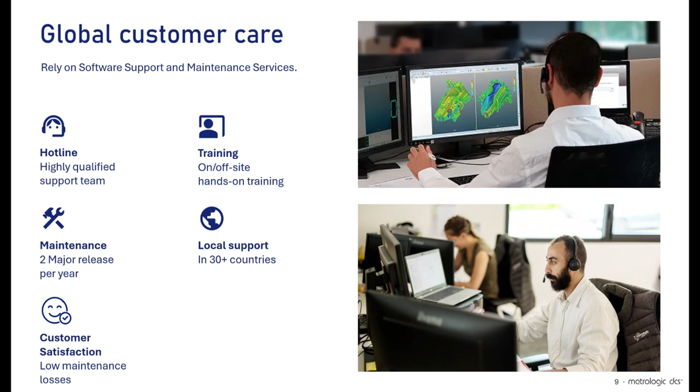We are proud of our core values: winning together, curiosity, responsibility, and customer focus, to always be close to you. In addition to our development and testing teams delivering 2 major releases each year, we provide comprehensive support through our hotline, training programs, and professional services for your custom projects. We also offer CMM maintenance and retrofit services for long performance and reliability.

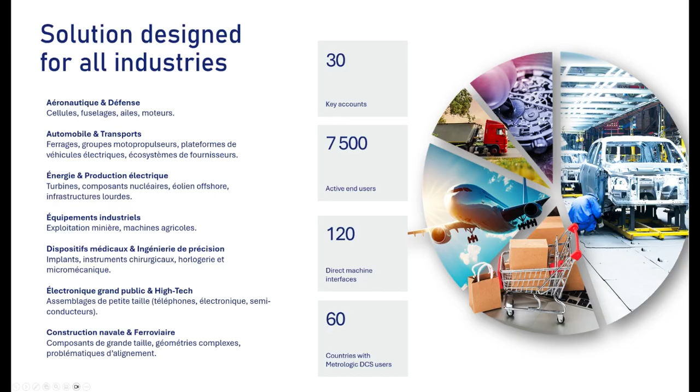Our solutions are designed for multiple industries, including automotive, aerospace, and defense, but also more high-tech markets such as medical devices and luxury watchmaking, for example. We have more than 30 key accounts and 7,500 active users.

Now focus on the topic of today: what is inspection flow? The objectives of this chapter are to understand what inspection flow is, our vision, the focus on the entire process, and its role in relation to our existing products. So what is inspection flow?

First, inspection flow is a metrology intelligence platform. In other words, it connects inspection data coming from different places, different stages of production, and it organizes everything with a clear structure.

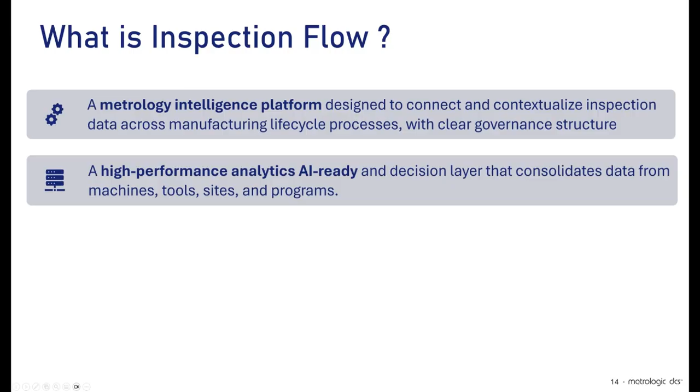Second point, it's a powerful analytics layer ready for AI. It takes data from your machines, your tools, your sites, your programs, and brings it all together in a single place so your teams can finally see the full picture.

Point number three, it's a scalable solution. It connects three roles that are usually separate - metrology, process control, and manufacturing - together for the first time.

Point number four, inspection flow turns your inspection data into something useful: statistical insight, operational alerts, information that is ready for AI, so you can make better decisions faster. Inspection flow brings a deep understanding of tolerances, GD&T, and metrology traceability. To summarize, inspection flow is not just a tool, it's an intelligence layer for smarter, faster, more connected manufacturing. Inspection flow doesn't just say what is wrong, but why, and what to do to reduce rework and scrap rate.

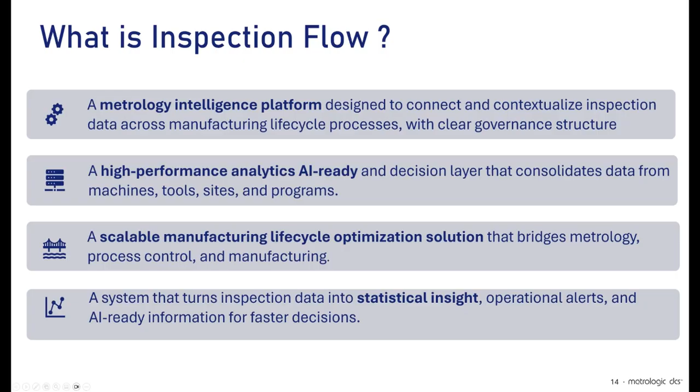Our goal is to centralize and connect all quality and inspection data and to deliver a reliable, real-time statistical insight. We want to be informed at any moment, every step of the manufacturing life cycle. The ideal scenario is simple: if one part is bad or out of tolerance, it's detected immediately, and the following parts are as close to perfect as possible.

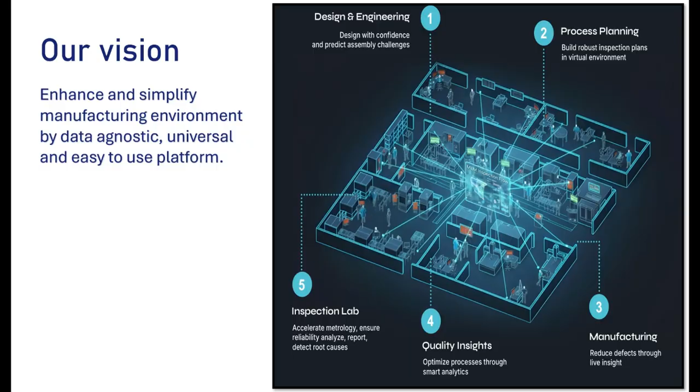Inspection flow starts your industrial AI journey by bringing all your shop floor data together. On this slide, we look at the full manufacturing process from design to verification. Our goal is not to change what you, as a customer, are already doing. The goal is to keep the same products and the same skills. What we bring is an additional layer that connects everything together.

This is where inspection flow comes in. Inspection flow is a central platform that manages the inspection process, collects and stores all data, and connects the entire system. As a result, everything becomes centralized, data is accessible in real time, and the goal is simple: create a fully connected system, more digitalization, faster communication, and immediately close the loop.

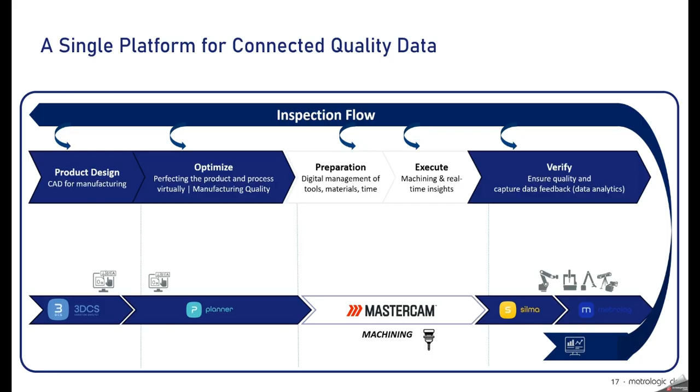So now we will see what kind of problems inspection flow solves. The objective of this chapter is what breaks today for the customer, what inspection flow does to solve this, and to focus on the general pain points.

Today, data is fragmented across different tools and sites. But now, with inspection flow, we replace that with a centralized and governed data ecosystem—one single source of truth, accessible and reliable.

Point number two: today statistical analysis is manual and always done after the fact. That's not possible today in 2026. So now, with inspection flow, we move to real-time, actionable manufacturing insight, so teams can act now, not tomorrow.

Point number three: today's information sits in silos and visibility is limited. With inspection flow, we bring total transparency and cross-team collaboration. This is very important—everyone sees the same data at the same time.

Today, feedback to the design team is often slow and informal. With inspection flow, we want to replace it with structured and automated feedback loops, and we're taking it a step beyond—the data is future ready, providing assisted decision making. In short, inspection flow doesn't just solve today's problems, it prepares us for what's next.

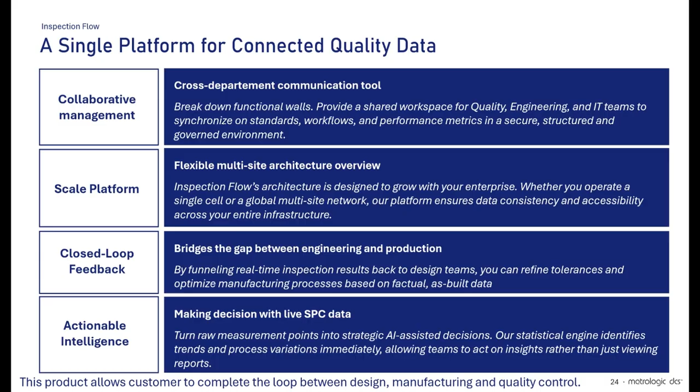Now let's talk about who actually benefits from this solution. First, design engineers—they need real feedback from production to adjust and optimize their tolerances and GD&T specifications. Second, quality directors and managers, because they need strong feedback to make better decisions with their team.

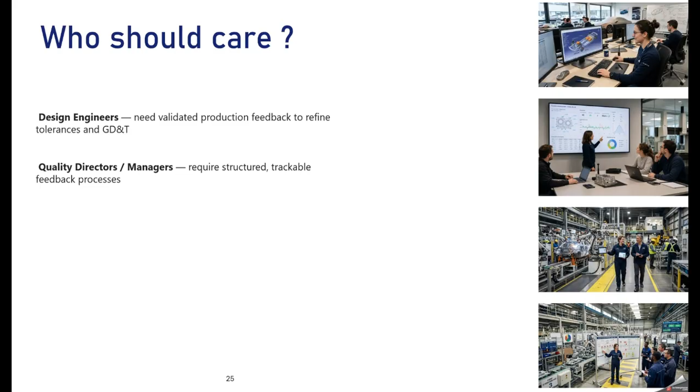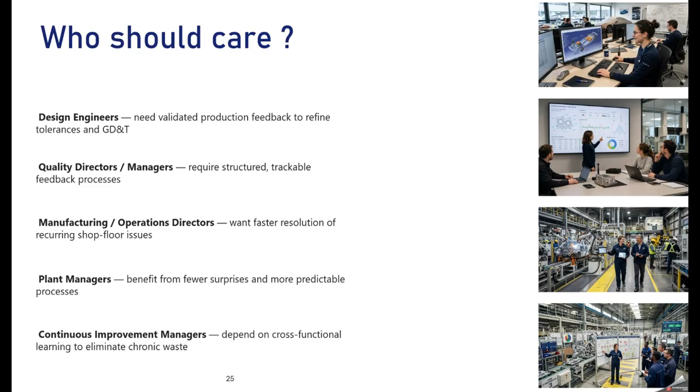Third, manufacturing and operations directors—their priority is to resolve issues faster. Point number four, the plant manager—they don't want surprises, they want stable processes day to day. And finally, the continuous improvement manager may also be interested. As you can see, this solution addresses real pain points across multiple roles, from the design office to the director managers.

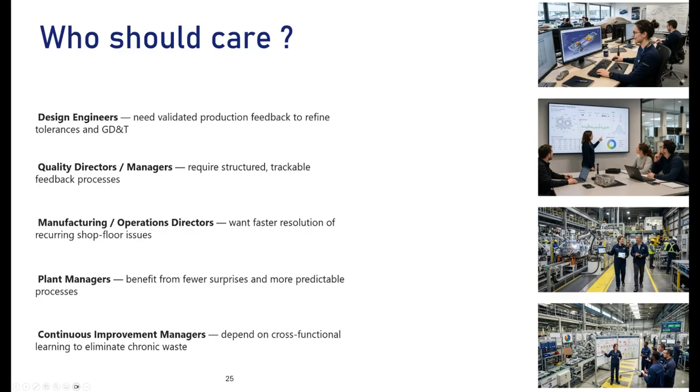Let's go now for the demonstration with Inspection Flow. When you log in with your account, you can choose which business unit you want to work on, which allows you to filter the different projects if needed.

Now let's talk about our account and access. Today I have full access. I will be an operator, a quality manager, and a programmer today. I can change various settings, maybe the language, the theme, switching between light and dark mode. We can also create additional business units if your company evolves or grows. You have full control over this with Inspection Flow.

Now with the action menu, you can view the last action performed, for example if you convert a specific model or start a product with Inspection Flow.

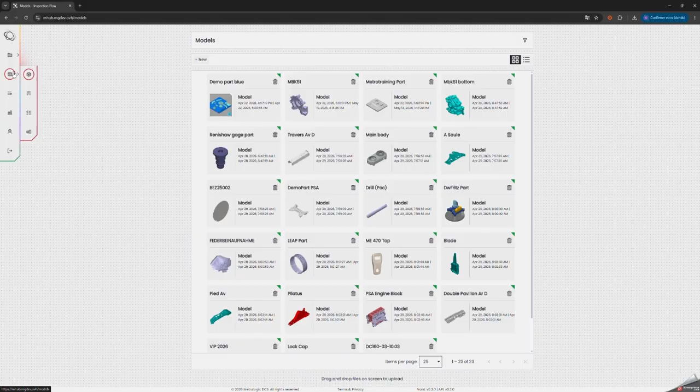Now let's talk about what we call asset management. You have access to all your models to inspect, all your measurement resources, all your CMM, arm, or maybe caliper, and access to all your rules. For example, if you want specific rules to analyze and inspect cylinders, and access to all the computer resources allowing you to start Inspection Flow.

Now it's time to go to the process menu, and using the project tree, you can find all your projects and documents on this page. Some already have results, others are still in progress. We can add subfolders if necessary without any problem.

Imagine I want to inspect a new part and start a new document. I have to go to the right subfolder and create a new inspection, so first I have to create a new document. To do that, I click on New and select a name for my document.

So, demonstration with MBK part, for example, and set some information about the details. Today it will be a demonstration for the webinar. I always have the possibility to select which project I want to work on.

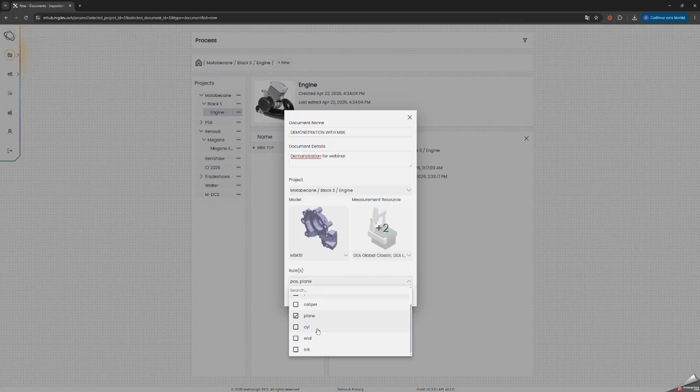The next step is to select my model, so the MBK today, and select which measurement resources I want to work with. I have the possibility to select multiple CMMs, and if I want to use specific rules, I can select them on this page. I click on Save, and my document is ready to be used with all the information necessary to work with.

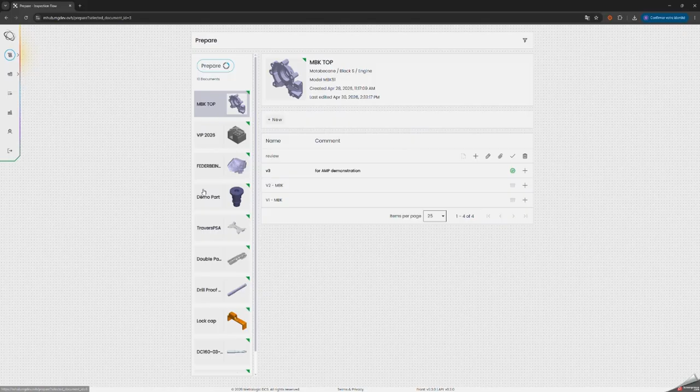So now the job of the quality manager is done. I can change my cap and become a preparer. I'm close to the design department, and I have access to all the documents ready to be prepared, ready to get a new inspection plan.

So I'm going to the demonstration with MBK document, and I will start creating a new inspection plan. I select my name, demo V1. I can add some comments. Today I want to decode only the model with all the PMI.

As you see, Planner is automatically started by the application, by Inspection Flow. My next step is to create an inspection plan collector to decode all the GD&T, all the planes, all the cylinders, and all the views.

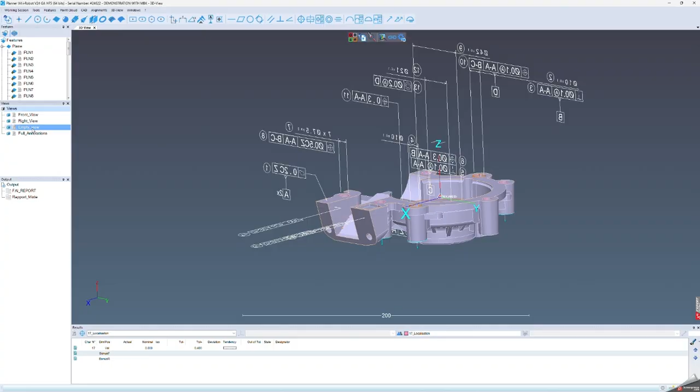I have the possibility now to add a specific view if necessary. I'm free to add a detailed view like this, so I put my name, full annotation 2.

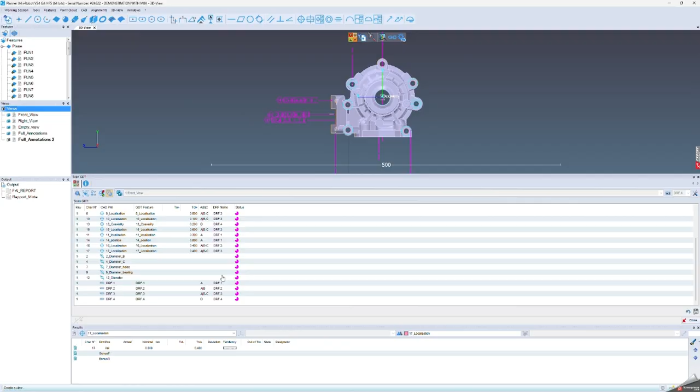There's also the possibility to check with the scan GD&T the status of each PMI, each GD&T, and this will change during the inspection with the result.

Now I want to assign rules with Planner, so I can add, for example, a specific alignment because I'm close to the design department and I know which alignment I have to use.

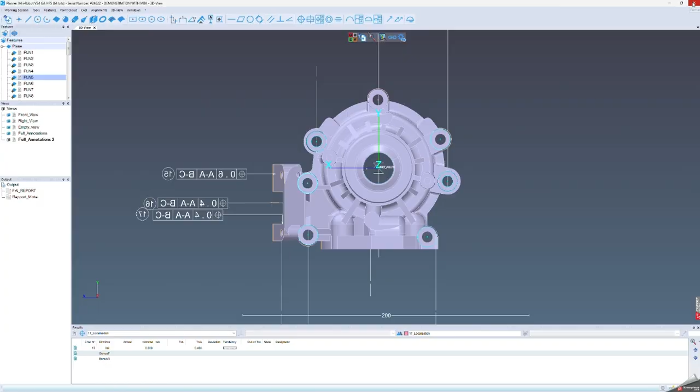So the job is done. For example, I can click on Close, and I don't have to save anything. Everything is automatically saved by Planner, and I have the possibility to delete, validate, or edit the file.

Maybe if I want to edit some information, it's possible with Inspection Flow. So, for example, just change this, and for the example, I will validate the inspection plan. So I click on Yes.

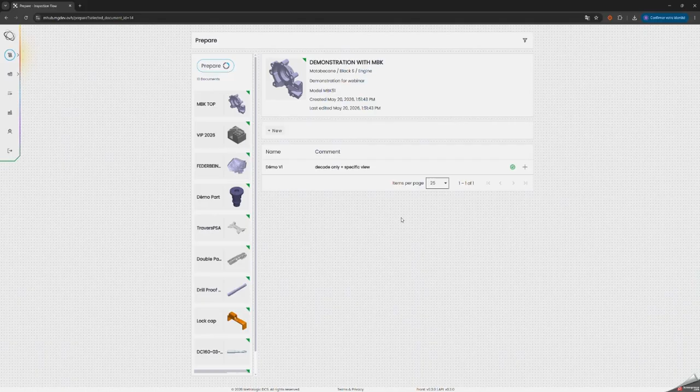But now imagine I want to add something because something changed. I can create a revision directly from my inspection plan V1. I just have to change it, so it's not inspection plan V1 but V2, and I add the comment to be precise: I want to add a flatness on plane number 4.

So I just have to start Planner again, always with Inspection Flow. It automatically starts. Just open, just create the flatness, so I'm going to the flatness.

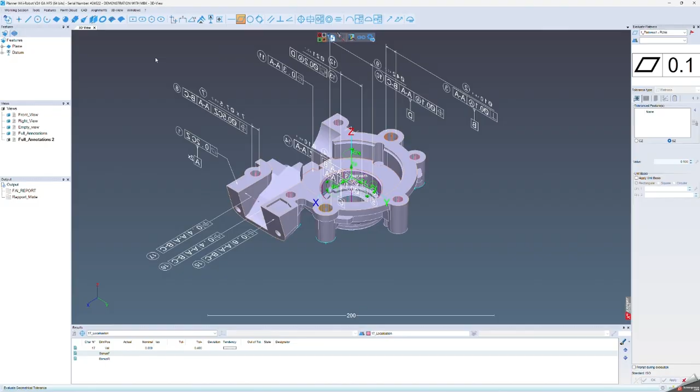I can change the name if necessary, I'm free to do it, and select plane number 4. Click on OK, change maybe the value of the tolerance, 0.2, click on OK, and my flatness is added to the features database.

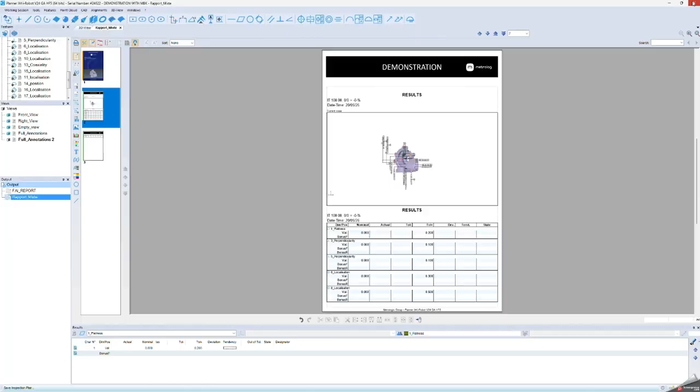So just now click on close, but just before I want to focus on the report. I can create a specific report if necessary for the end of the inspection. As you can see, now I have to validate the inspection plan V2. So I click on validate and yes.

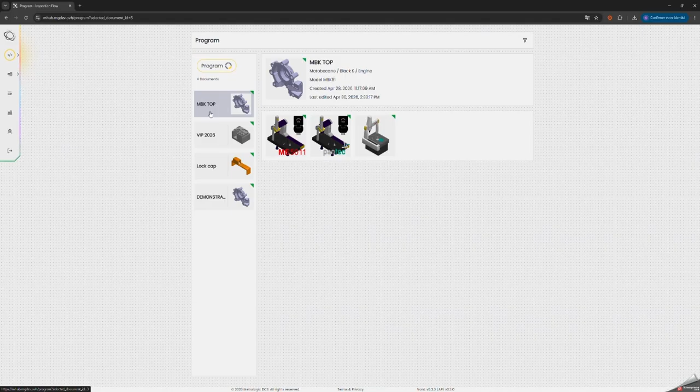So like this, I have only one inspection plan to work with. So I can change my cap now. My job is done, so I can become programmer offline. So imagine I am in another country, maybe it's possible.

And I have to select now my document. So always demonstration with MBK and select the CMM to create my program. So I want to select today the Pantec. And like inspection plan, I have to create a new version of my program. So demonstration prog V1, and put some comments. So today I want to work with the inspection path planning.

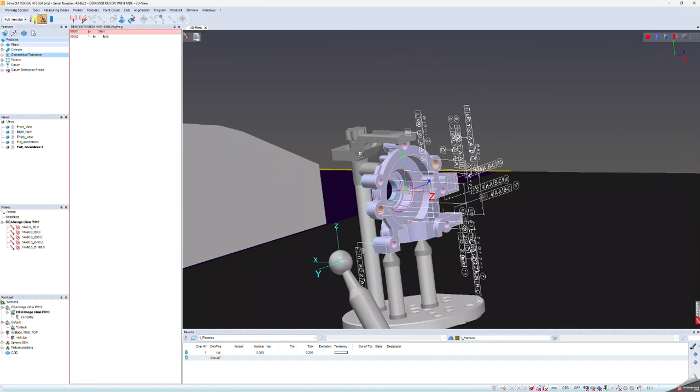So I click on save and automatically my work cell, my model is open with Silma. I have my head and all the features automatically updated thanks to my inspection plan from Planner, all my view also.

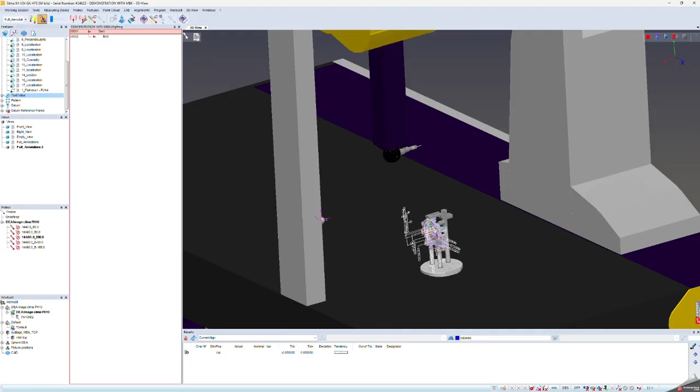And now I have to use a quick move to put the head in a safety position, so it's moved automatically. And the next step now is to select all the features I want to inspect. So I select all the planes and all the cylinders, and I will use the inspection path planning. I click on OK, like this, and I have all the rules.

So I have the trajectories for each feature, each cylinder and plane. I can use the collision management to avoid any collision and activate the probe automatically, and just click on Calculate, and all my trajectories will be automatically generated thanks to Silma.

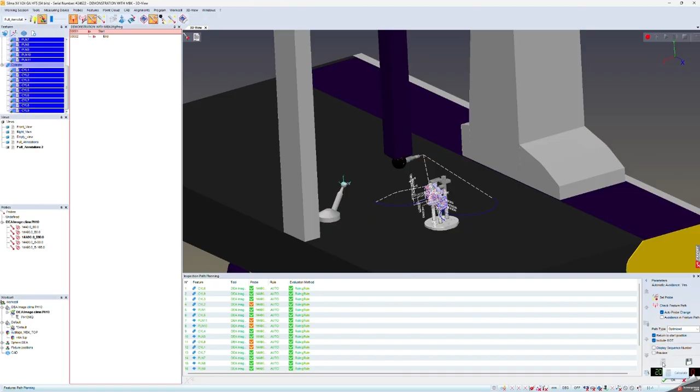I can click on OK, so all is green, so all the trajectories and orientations are fine. And my program is already created. So I just have to make a few clicks like this.

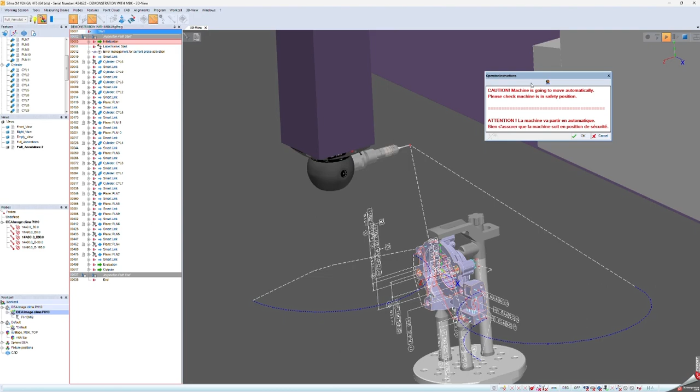And if I want, I can maybe select the path planning to see all the trajectories easily. I can click on play to check if my program is good or not.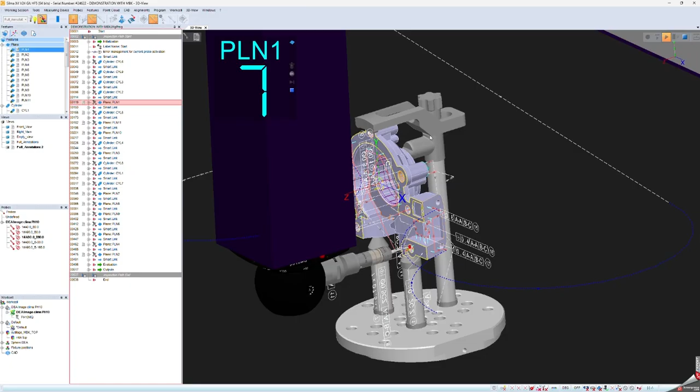And as you can see, the CMM is moving and takes all the cylinders and all the planes in my program. So I can click and play with the speed like this, and just want to check if I have a collision or not. Today it's fine, so I can trust the inspection path planning and Silma.

So when it's done, I can click on OK, and like Planner, I can close Silma, and I don't have to think about saving the program. It's automatically done by Inspection Flow. I can always change some information, but I want to validate it in this case.

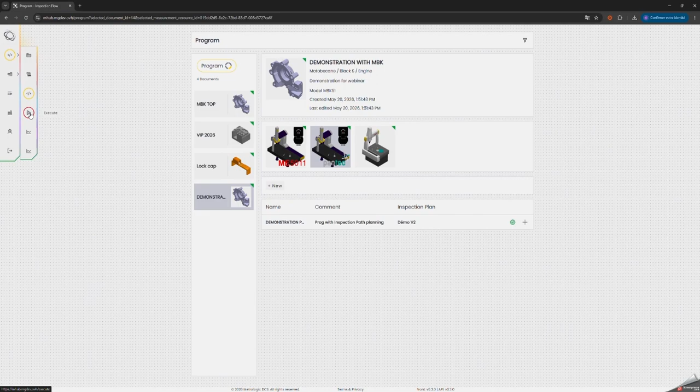So now the program is validated and the job of the programmer is done, and I will execute now because now I am operator. I am operator and I want to execute my program generated by my colleague just before. So I select my document and select the CMM to run my inspection, to run my program, sorry.

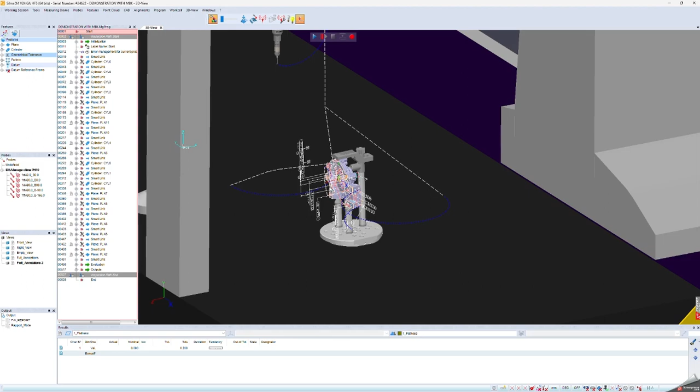Metrolog will be automatically started by Inspection Flow. And I have the possibility now to run my program on Metrolog. So today I'm not really connected to a CMM, but imagine I'm connected to a CMM with a real default.

So I just have to validate some message information and play with the speed because I'm not connected, so I don't need to talk about it. But my program is running.

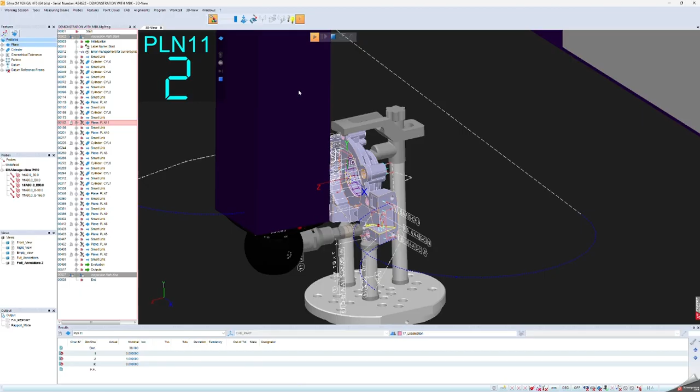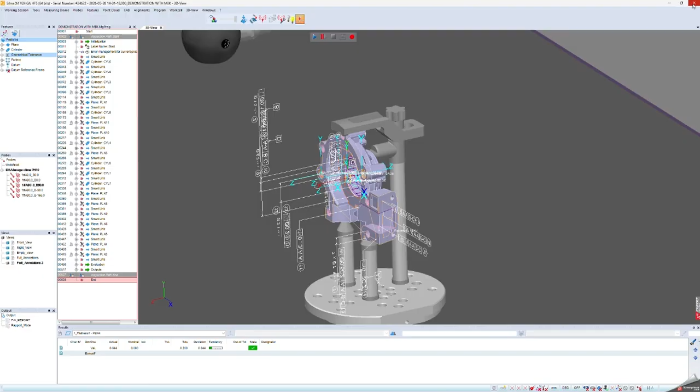All the features are measured by my head and my probe, and I have the possibility to perform a new run. So I click on yes because I have many parts to inspect today. So I can click on yes for each part, and I don't have to save any work. All is saved by Inspection Flow.

And now it's time for the SPC analyze. Analyze the result with a relevant stakeholder. So it's a perfect moment for precise, high quality feedback based on the factual data.

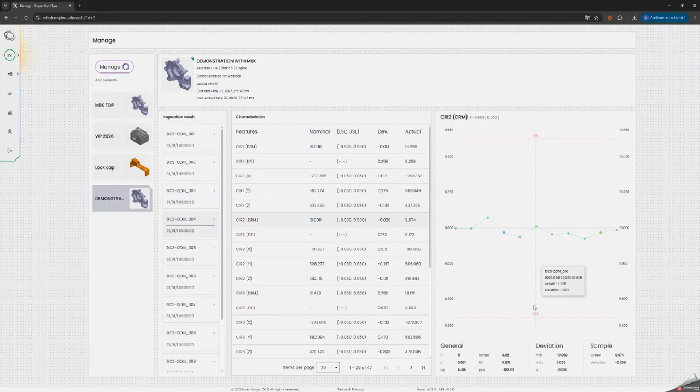So we have an advanced statistical analysis here that can be shared with multiple departments to close the loop and improve efficiency. So in the event of a default, some alerts could be sent to facilitate faster decision making. So it's very important to be aware at any time, depending on the department.

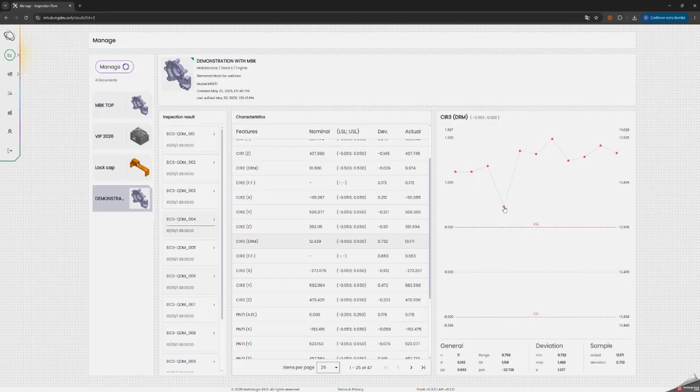So please remember, Inspection Flow is a metrology intelligent platform designed to connect and contextualize inspection data across the manufacturing lifecycle process. So I hope you really enjoyed the demonstration, and it will be time now for the Q&A session. Thank you.